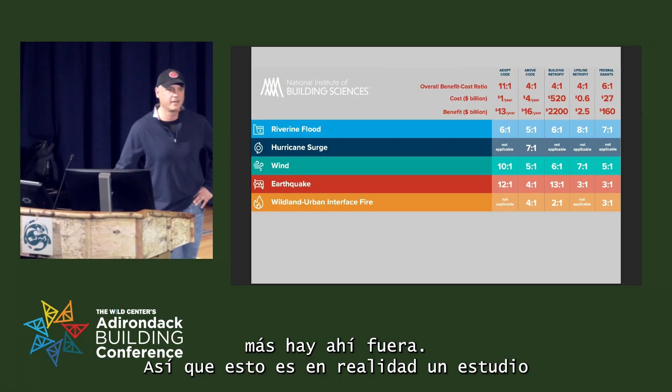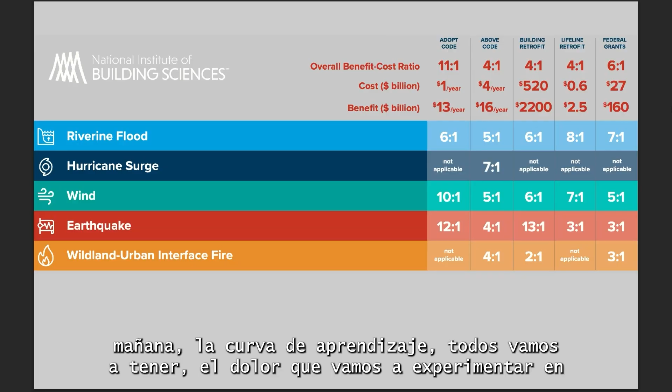So as much of the struggle that Kevin's talking about this morning, the learning curve we're all going to have, the pain we're going to experience on site - I can definitely tell you my duct systems will not pass as they sit now under the new metric if they're tested. I only know that because when I test my ducts, they fail, and then I understand where and how I have to make corrective work before drywall to fix them.

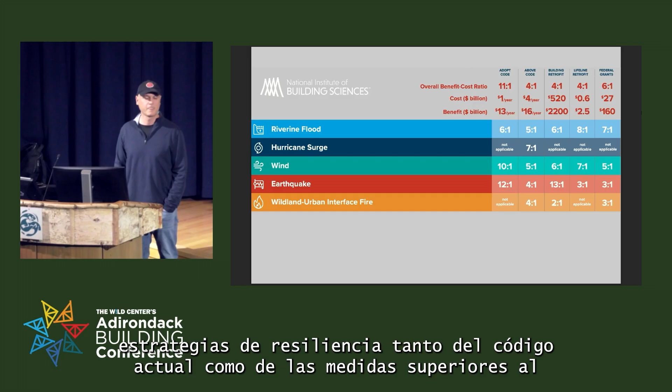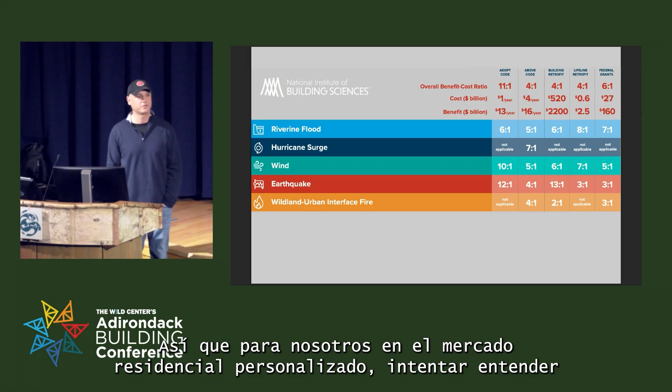These studies are out there. They show the cost-benefit return of resilience strategies of both current code and above code measures. So I can go to a client and say, here's our code minimum baseline, but I have these other recommendations I'd like for you to consider for your project. It might feel like health to you, it might look like comfort, it may be a lower or higher utility bill. So for us in the custom residential market, it's about understanding what our client values and making the argument to them, but also to the code officers about why we're doing things a little differently.

This is a study that's out there, I can share it, but basically it sets a baseline that if you do it cost effectively, you can create a lot of value into the future. It's similar to one Kevin had.

I'll show you a project a little later because we not only build, but we also do a lot of forensic consulting - we get a lot of calls typically from other builders like, hey, there's smoke coming from my ceiling, can you come figure out what's up? And the firefighters are saying it's not a fire, so what is it? So what we try to do is look to see what tools are out there.

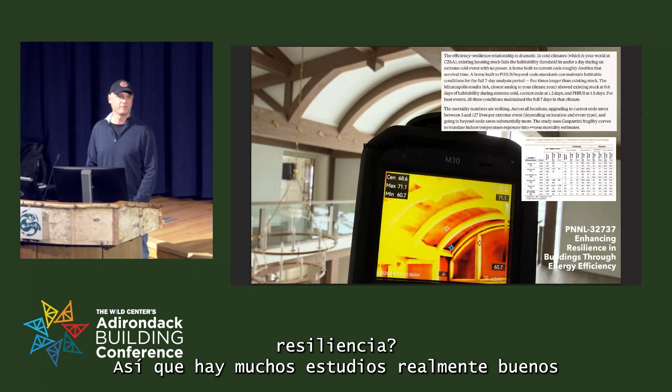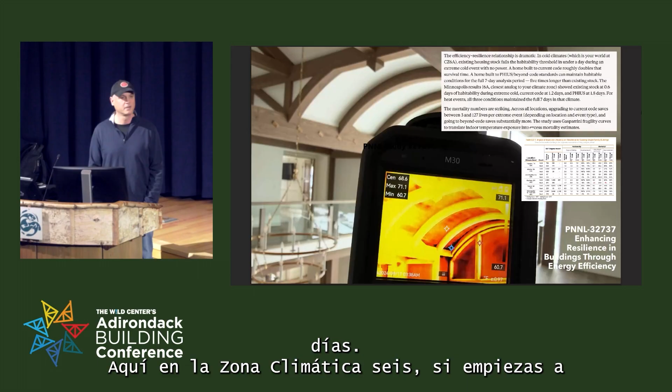But for this slide, what I really wanted to communicate is if the building and energy code look at efficiency as the baseline, how can you use efficiency to start to build resilience? There are a lot of good studies out there around passive survivability - how long you can shelter in place in your home if the power goes out. Typical buildings: less than a day. Code is about 1.2 to 1.5 days here in climate zone 6. If you start to look at passive building like PHIUS, you can extend that to 7 days.

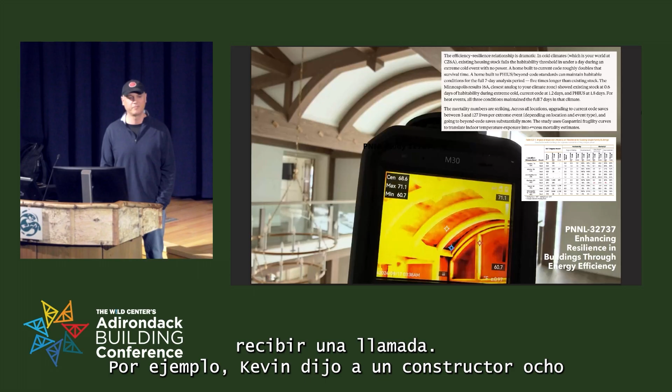But then you also have to ask: if dealing with extreme cold, do the same strategies apply to extreme heat? They generally don't. So the expectations of clients when I go say, hey, if I go to a passive level for your house, here's the cost delta, but here are the benefits - I should be very confident that I'm right in what I'm recommending, so I don't get a call like Kevin said, from a builder 8, 10, 12 months later saying, you told me if I built PHIUS or passive house, or invested in more insulation and a proper air control layer, I could shelter in place for 7 days. Well, the power's been out for 5 days and it's not livable. I can't be here anymore.

So what we try to do is take that scientific basis first. We rely on studies like this one - Pacific Northwest National Lab has done this, looking at efficiency as a baseline. I won't kill you with the graphs, but it basically shows you if you build to code, PHIUS, or above code measures, how much better that house is going to perform in terms of passive survivability, but also reduced mortality, windstorms, flooding - clear benefit there too. I won't go into it much further, but I'm sure the slides will be available and I can share these studies.

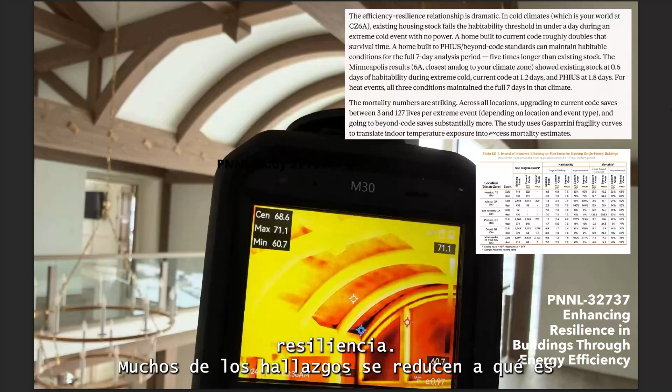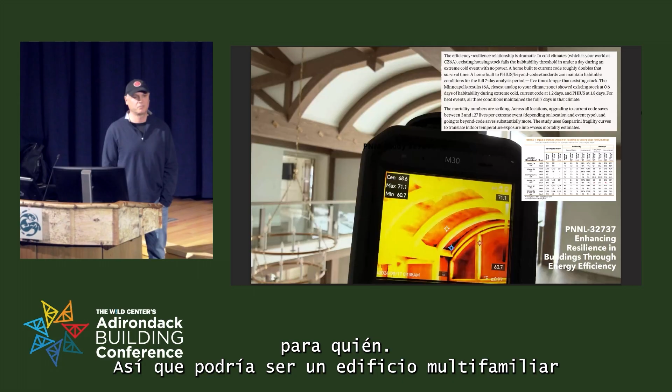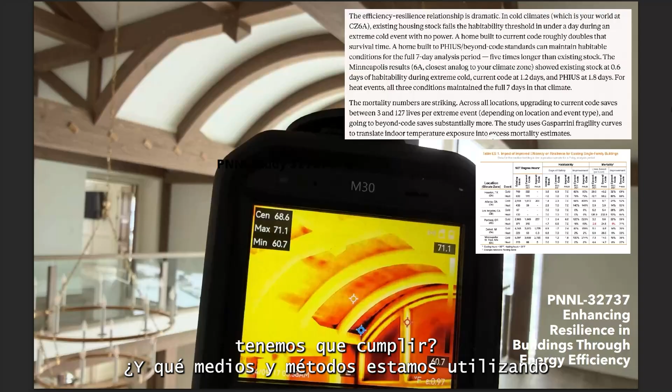So as we start to look at how to add resilience to our projects, we start with the current code and ask what code provisions are already there that we have to comply with, and then what means and methods are we utilizing to do that? How can we do it a little differently so our performance is higher? So it's not different from the code—code is baseline plus.

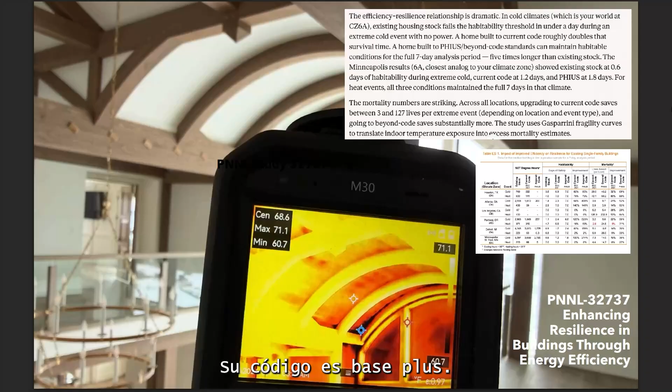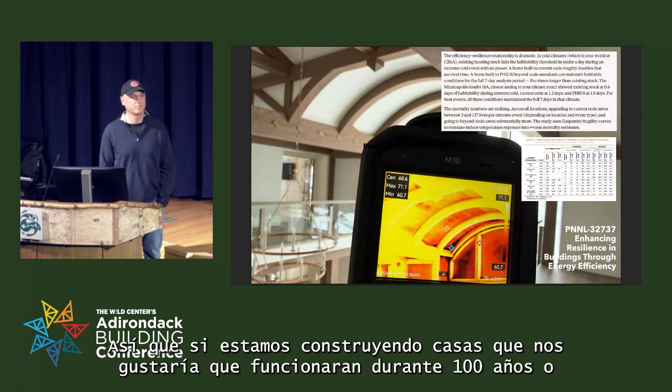So lots of studies here. Some findings, like for the energy modeling that Kevin talked about that everybody here is familiar with, are based on historical conditions, not what the anticipated future temperatures are going to be. So if we're constructing houses that we'd like to persist and function for 100 years or more, what future conditions is that house going to encounter, and is it designed to those future conditions, or was it designed based on historic conditions? I think everyone knows that house is designed to historic conditions.

Historic temperatures, historic water, rainfall, snowfall—and the future conditions our buildings are going to encounter are significantly different than even what the recent past has shown. So from a duty of care, if we're building these houses for clients who want to be in that house with their grandchildren 30, 40, 50, 100 years from now, I feel we have to understand what that future weather, that future climate, that future rainfall or precipitation is going to be.

And that directly relates to our four primary control layers—where we place our air control layer in the wall, vapor control layer, whether it's Lstiburek's perfect wall or a vapor-open assembly in the passive house world. We think pretty carefully about that to understand those heightened maximums that building is going to encounter—everything from heat on roofing, heat on sealants, the variability that Kevin mentioned in the morning session.

When you go through a 70-degree swing in a day, repeatedly, you're stressing all the sealants, the adhesives, all the connections, the intersections, the different components of the assemblies—they're going to feel enhanced stress and pressure. So how are those assemblies going to perform into the future?

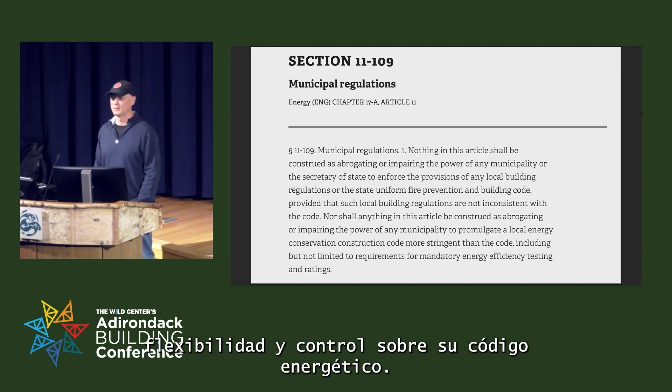So one of our projects, we just did a more stringent local energy code for Hastings on Hudson. This is a really interesting one for local municipalities that want additional flexibility and control over their energy code. As long as it's consistent with the state energy code and more stringent than the state energy code, a local municipality can actually adopt a more stringent local energy code.

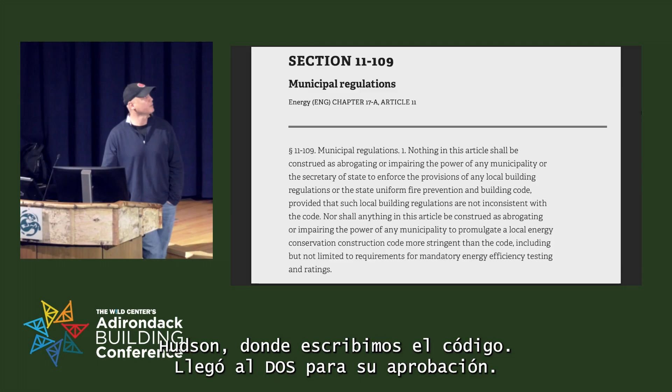So I'll show you an example from Hastings on Hudson where we wrote the code. It went to DOS for approval under energy law 11-109, and they're actually enforcing it now. The Town, City of Ithaca has done the same thing when they shifted to all electrification.

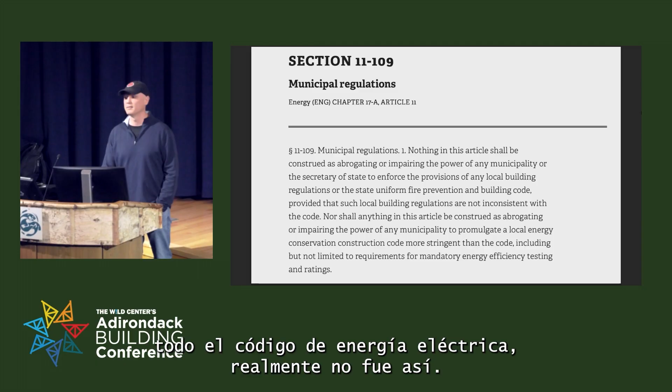The secret of that, when the headline came out that Ithaca adopts all-electric energy code, it really didn't. What they provided was optionality and no mandatory requirements, and just made it a lot easier to choose the all-electric option than the gas-fueled option. Similar to what Kevin talked about this morning in terms of 15 versus 20% efficiency, depending on whether you've got a gas appliance or not.

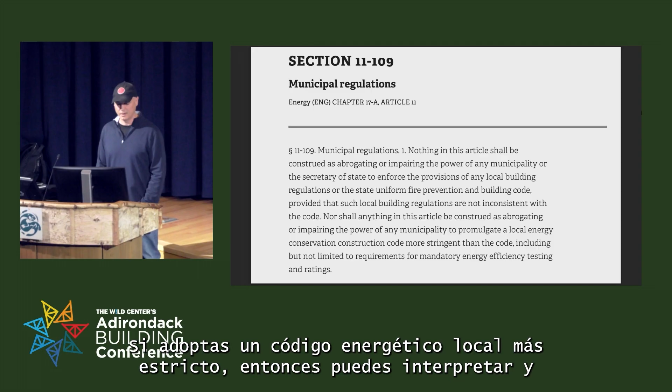So this is in the new energy code. It basically tells you exactly, gives you the permission to do it. 11-109 tells you how to do it. But the interesting thing here is the local jurisdiction, the code officer gains the ability to interpret the provisions of the more stringent local energy code. So typically, you'd have to go to DOS, submit a formal request, ask for an interpretation or variance. If you adopt a more stringent local energy code, then you can interpret and apply the code.

So Hastings on Hudson green code, this is one way that we use the energy code to bring resilience into it. This is one of the resilience provisions that we drafted for that code. Basically it said, hey, if you go to a site, look at the top 3 things that are going to hurt your building or the people in it, and figure out how to deal with them.

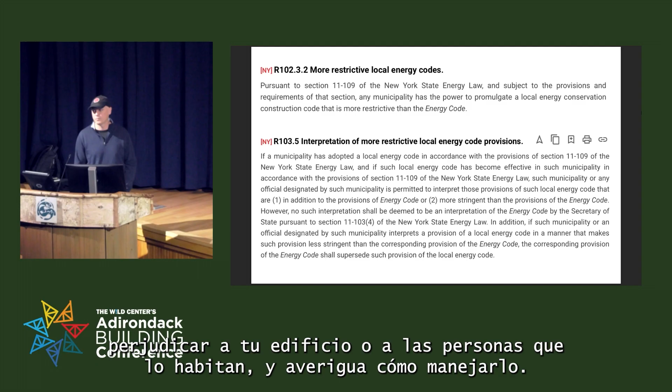Whether it's flooding, figure out whether you're in a 100-year flood zone, a 500-year flood zone, whether you don't have to worry about it, figure out whether snow or wind or whatever it is a risk. And then where you go is back to all the state level resources. The hazard plan will give you information for that jurisdiction on what those risks are.

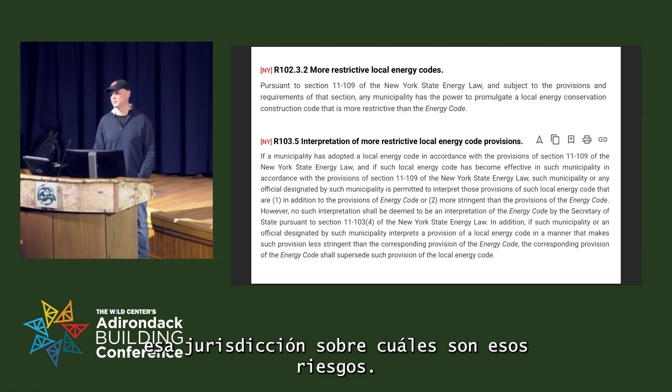I would say most builders, if they're paying attention, are going to figure out what those risks are on a site better because they're going to try to manage them anyway, whether it's flooding through on-site stormwater design, whatever it is. But you know, you can also put a lot more into just the energy code.

These are some of the provisions just for site from the Hastings code. And this was the Hastings Village Board of Trustees saying, hey, these things are important to us. Put them into the code, assign points, let's pressure test it with a few actual projects to see how and if it works. So this is a way that towns and villages, if they're dealing with issues, can bring them into the energy code through this process.

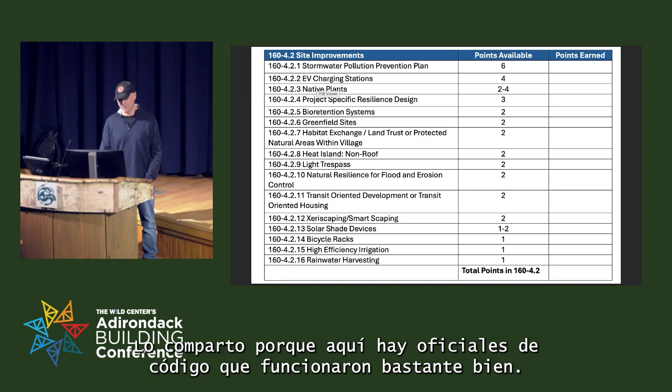So it's one way to bring resilience to your jurisdiction. I share it because there's code officers here. Worked out pretty well. Now I want to get to more of the resilience science of it and why we make the decisions we do on what we build.

So the first thing resilience would say, and I think everyone here would agree, is you can't just focus on one thing. You can't just focus on the insulation or the mechanical ventilation. And even the code itself makes these really tenuous connections between, you know, how to size manual J, D, and S, your HVAC system, how to calculate ventilation.

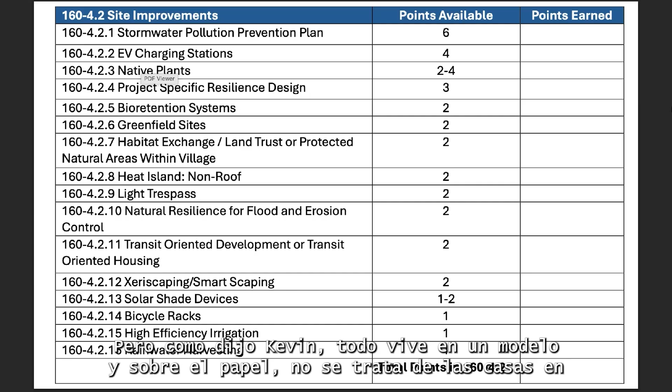But as Kevin said, that all lives in a model and on paper. It doesn't deal with the lake houses we build that are 6 to 8 bedrooms with 2 people occupying it for a couple weeks out of the year. And setting those ventilation rates in a way that doesn't destroy a very expensive millwork package, or in the summer load the interior with too much humidity and vapor to start growing mold.

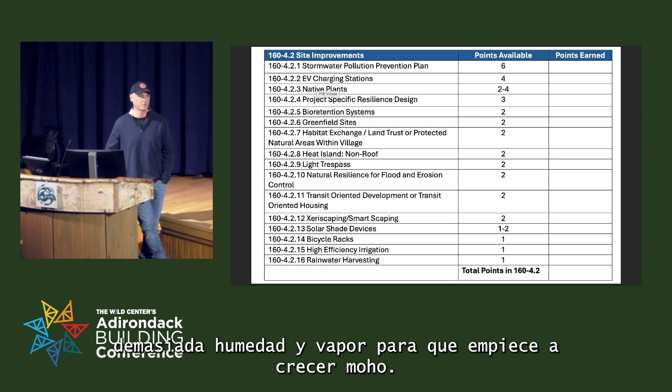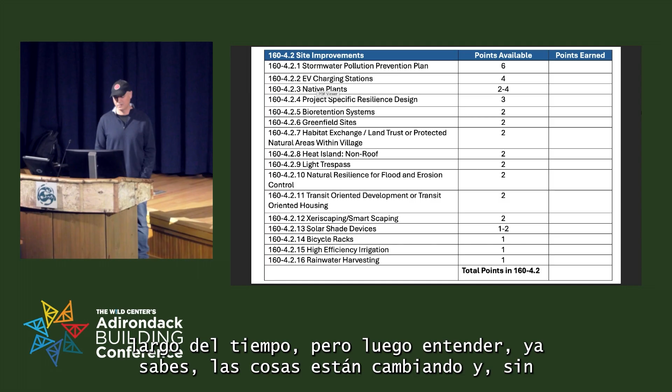So it's a way to shift from that baseline—to your point, the minimum you have to do to comply, get your CO, and do what the client hired you to do. But part of it is looking back, learning from what that site has done through time, but also understanding things are changing. No matter what someone's perspective is on climate change, its extent or cause, I think we can all agree there's a higher level of variability in rainfall, temperature, precipitation, all forms, that our buildings have to deal with.

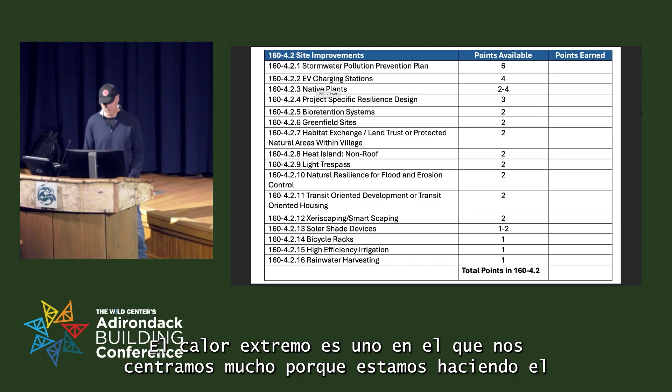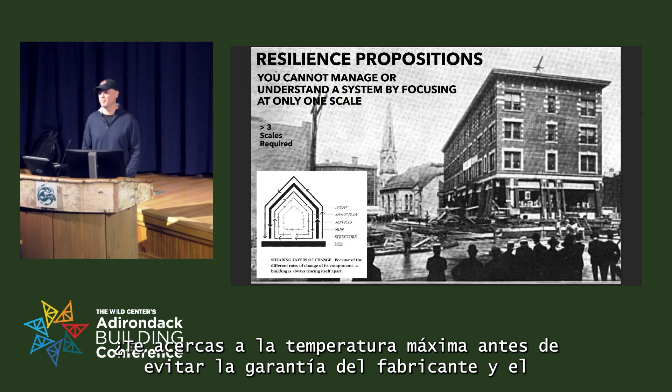Extreme heat is one we've focused on a lot because we're doing the extreme heat plan for the NYSERDA codes team now. It was really eye-opening looking at the durability of typical building components and materials. When you read the performance criteria for electrical wiring, the Romex, what's your maximum temperature of Romex in an unventilated versus a ventilated attic?

Are you getting close to the maximum temperature before you void the manufacturer's warranty and affect the performance of the Romex? I asked my electrician that, and he sent me a picture of yellowed-out neutral wires on a panel that he had to change after 8 months—different builder—because the mechanical room was so hot it started to impact the wiring.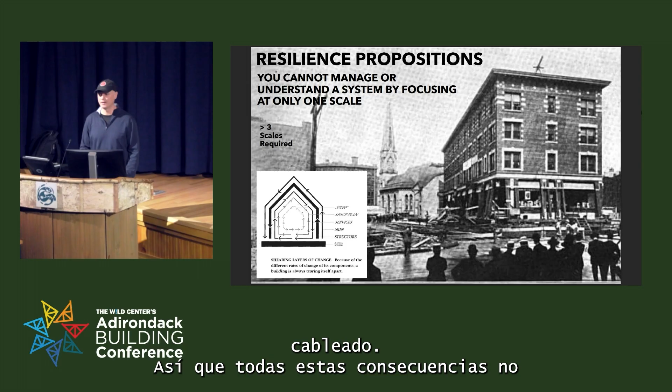So all these unintended consequences—the new breakers, new GFIs, everything giving off heat either from inside the building or from the external environment—it's starting to have impacts on things that clients would never think twice about until they see a problem. Then they look at you and say, why didn't you know about that? Or why didn't you encounter it?

So for us, I won't go into this story because I'm probably a little behind on time.

All right, so one thing we do as builders is look back, because we want to know what's in the ground. If there's an old foundation there, we have to talk to the client about structured fill, or if there used to be a river that flowed through or something that would give us a problem in construction.

This was part of a Syracuse University project to help them get to zero with residential housing. We went to the Adirondack Historical Society, and on one of the sites we were building on, we saw a picture and didn't recognize the building. It had been demolished, like most beautiful old buildings in our city centers were during urban renewal in the 50s and 60s.

That's the Hotel Truax, built in 1920. It's a 4-story, 12.4 million pound hotel that they actually lifted off its hand-cut stone foundation, rolled across the street, spun 180 degrees, and put back down on its original foundation—and the hotel never closed. It kept guests checked in and out during the entire move.

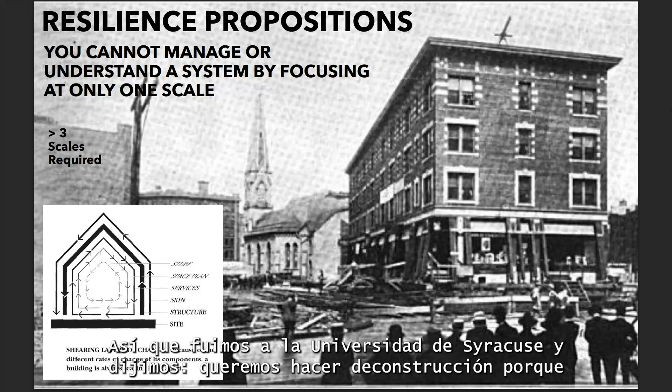So we went to Syracuse University and said we want to do deconstruction, because deconstruction is a key resilience strategy—it's embodied carbon, workforce development, a value-added thing. They were terrified of the idea of deconstructing a house, but it's kind of the reverse of construction. When we showed them this and said that's what builders did in 1920s Syracuse, why can't we do that on a site locally?

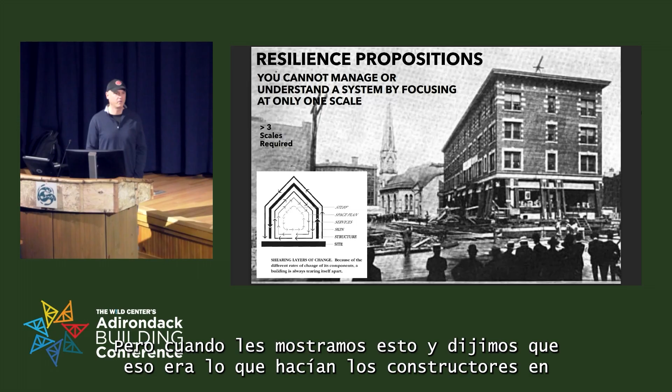So for us, time is part of the tool of design, where we look to see historic conditions. We understand what the code is telling us, the environment the code is telling us to build to with the climatic data included in the code. And then we ask, is that going to work here for the next 100-plus years? Generally not, when you run into limits like the Romex maximum temperature, or the maximum temperature of caulks—what type of caulk to use.

Because if it's a simple decision between silicone or urethane for a certain condition, and silicone has this maximum temperature while urethane has that one, then why not go with what you know is going to work and is going to be exposed to?

It's just better building, less callbacks, less problems, however you want to phrase it. So we realized looking back is really important, but we also realized how the code treats a building at multiple scales. When I'm talking scales: structure, skin, cladding - the 4 primary control layers that Building Science Corp talks about, and how those are all integrated, because typically the code thinks about materials, not assemblies, in terms of where's the primary air barrier.

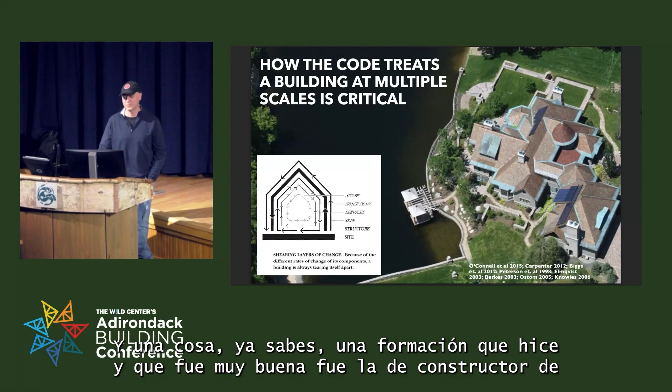One training I took that was really good was the PHIUS Certified Passive House Builder. I don't know if anybody else here has taken that course, but it's a really good exercise in looking at the different characteristics of each material in an assembly and understanding that there isn't just one line in that assembly, to Kevin's point, that is the primary air control material. It's an air control assembly.

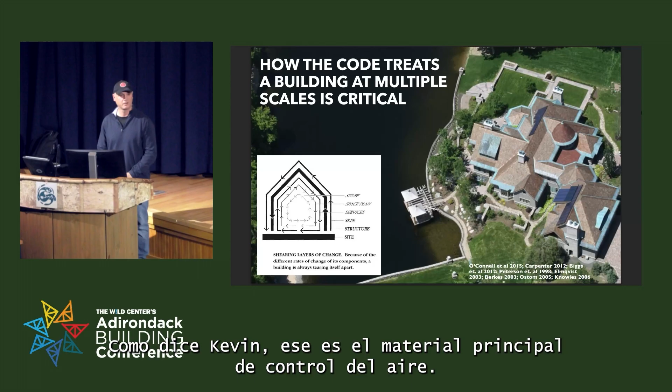And then how are these assemblies going together at critical connections - top of foundation wall to wall, from wall to ceiling - because that all really, really matters. Those are our vulnerable weak points in any assembly.

So this is just a picture from a really great book Stewart Brand wrote, How Buildings Learn, meaning how buildings experience change over time. So we just break it out, different components over time and what's going to fail and where. And we don't want to entangle a failure in a layer that should be there a lot longer.

So structure should be there for 500 years. If you go to Europe, you see buildings that have been there for 1,000 years. So why can't we, to your point, code being a minimum, build a house for 500 years? Everybody laughs at you when you say you're going to do it, and it's going to require maintenance, absolutely. It's not like you're going to leave the same roof for 500 years, but why can't it be there?

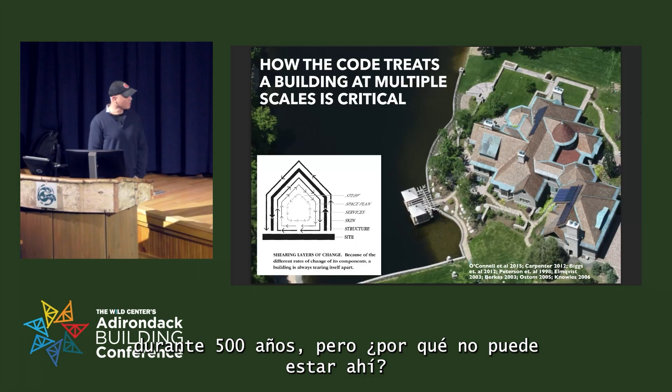And making sure each of those layers that the code deals with, and how you install those layers, is really critical, so that you're not having to demolish something in 30 years that could have been there for 100 years.

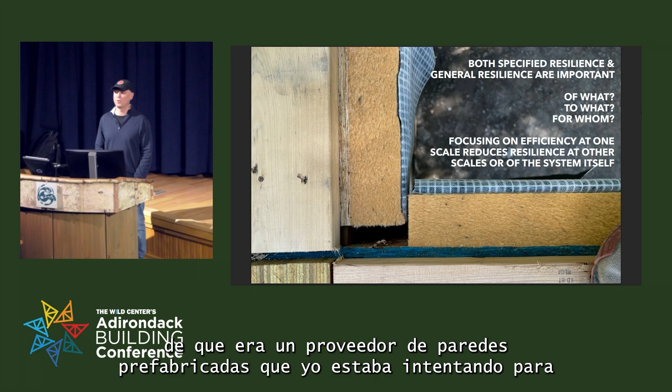So you get a lot of stuff like this, and I'll get into your point about innovation and creative materials. This was the argument I had - it was a prefabricated wall supplier that I was trying for a guest house. And I lay under the wall, I take the picture, and I'm like, okay, we got to talk. This isn't going to fly.

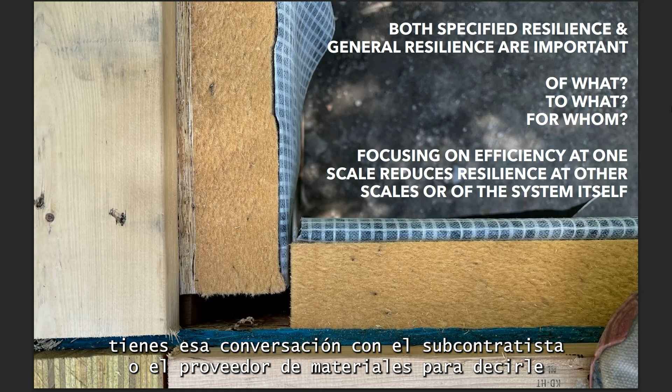They wanted to put a little bead of sealant on the corner there, and they showed me a cartoon picture online that said, look, you just use the sealant, and that we're only worried about air. I'm like, I'm not only just worried about air there. When you don't have the manufacturer's installation instructions at a level of detail, how do you have that discussion with the subcontractor or a material supplier that, hey, you didn't do it right? So it doesn't turn into just an argument that doesn't have a clear baseline to it.

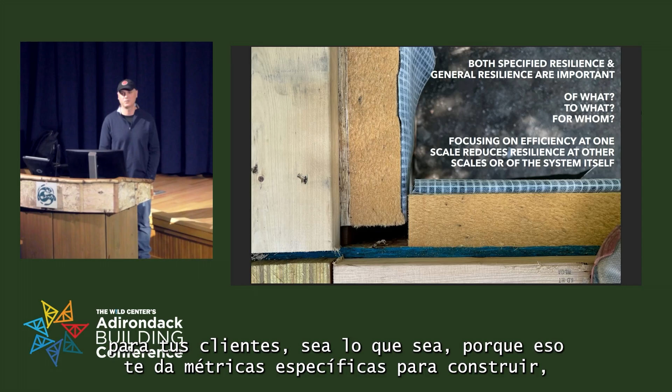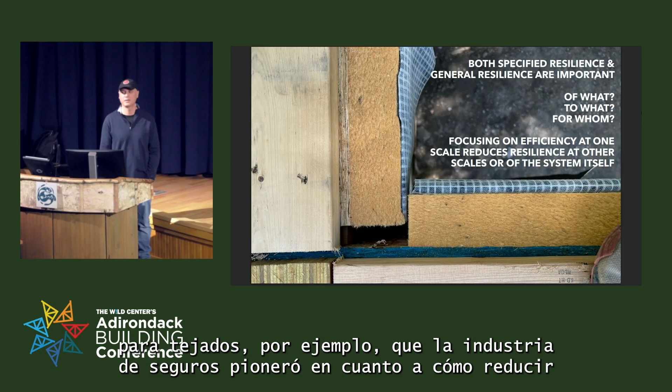Going on that, the only point I would make here goes back to the ICC resilience - you always have to ask the question of resilience of what, to what, and for whom. So, of an enclosure to hurricane for your clients, whatever it is, because that gives you specific metrics you can build to. You can look at the ASCE wind data for your location. You can look at fortified roofing standards, for example, that the insurance industry pioneered in terms of how to reduce your insurance premiums if you just build to the fortified level.

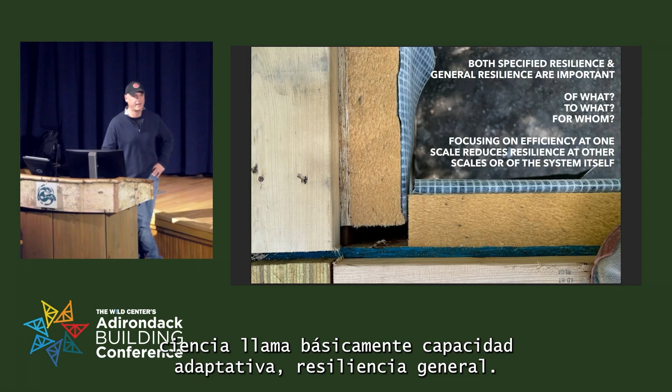And it's all really simple, good practice for roofing anyway. They give you checklists, very easy to do. And what you're trying to do is not just the specified resilience, but what the science calls basically adaptive capacity - general resilience, to the unknown.

So like the microburst that the Adirondacks might see only once in 500 years - do you design to it? Is it worth the investment from your client to do that, or to not do that? Those are things to at least think about. And then to look into the near future over the next 30 years, which those state level resources do, to say, are those type of severe storms going to become more common in this area? And if so, maybe fortified makes sense for you, for the location.

But this was one of our consulting projects we got called to, to your point - we'll get to the innovation. So we were building a house about a quarter of a mile down the road, and you know how on job sites people talk, they're like, oh, there's this house down the road, it's got some trouble, but kind of bouncing back and forth.

So one Saturday the owner called and said, hey, can you come take a look? We can't fix a roof leak. And so we went, Kevin and I jumped on the roof, and said, well, we can fix the leak very easily, but how do you approach that?

For me, frankly, I'm probably not a good enough building physicist to look at that like Lstiburek or Straube would and pick it apart with the PhD level analysis. But you've got manufacturing, installation instructions.

Does anybody ever use or read ESRs at all? The evaluation service reports - those are really critical. I'll show you a photo of one.

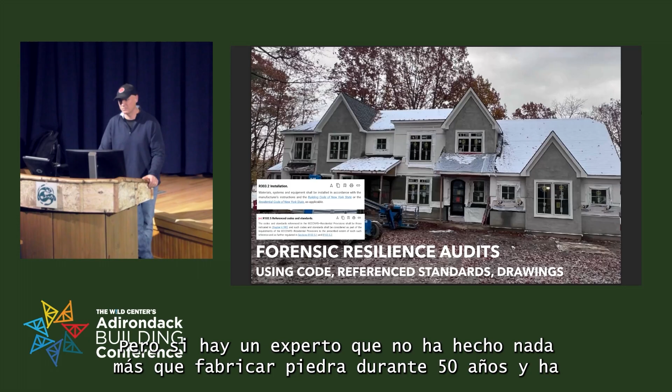That's where, I think as a builder, the best thing you can have is some humility and just say, hey, there's things I know well and things I trust and I won't negotiate or break. But if there's an expert who's done nothing but manufactured stone for 50 years and has written that tech spec, and you can get that person to the site to look at it and say, yeah, I agree with you that my detail, my MSV detail in the Manufacturers Association, conflicts with the EIFS detail - so do this, and then get a sign off and move forward.

Yeah, because I mean, the power that you have as an AHJ code officer is really immense. Part of the other training that we do for energy code is, you can require me to remove sheetrock to inspect the air barrier. If I don't get my air barrier inspection, you can make me take that off. A lot of builders don't understand that.

So absolutely - that's where, to your point, understanding how these different requirements play into the project and what weight they carry is really critical. Because if I just say, hey, I built to the energy code, but I didn't read the manufacturer's instructions, then I've not done my job properly. And if I don't go look at the ESR that is either fully consistent with those installation requirements, then I can check that box and say, all right, code, manufacturer's requirements which are code, ESR - all agree.

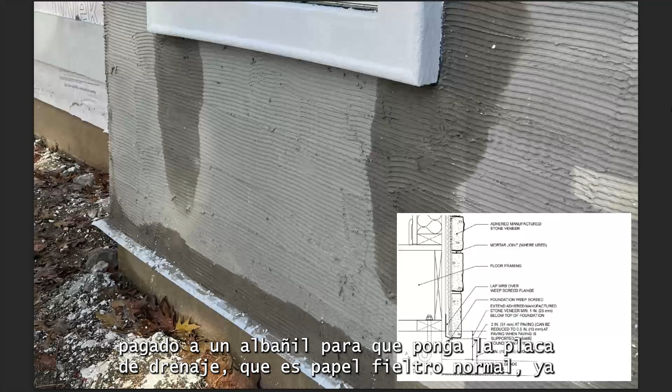So we come here, we look at it—there's one of the details from the Manufactured Stone Association, looking at the weep screed at the bottom of the wall detail, we're looking at the wetting pattern. Now we've got to tell the client: you paid a mason to put the drainage plane on, which is just regular felt paper, the weep screed, all the rest of it. But with what we're seeing, we think that wall's wet.

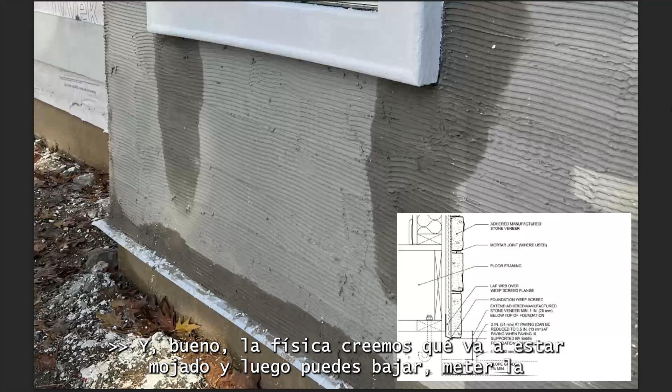How do you know? Well, physics. We just believe it's going to be wet, and then you can get down there, put your head underneath, and see. So we told them we have to take it off because it's the enclosure. Water's the primary damage function of a building after fire and structure, so this will destroy it. And this house was only 8 months old when we got to it in construction.

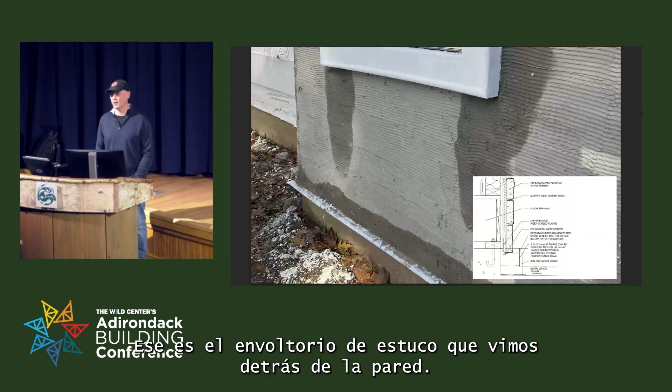So we looked at it, started to take it apart. This was actually under the EIFS elsewhere—that's the stucco wrap we saw behind the wall. It was like a nice interior drainage plane that went down. That's a moisture meter at the bottom showing the OSB is saturated. It kind of flaked off in our hands when we even just tried to touch it.

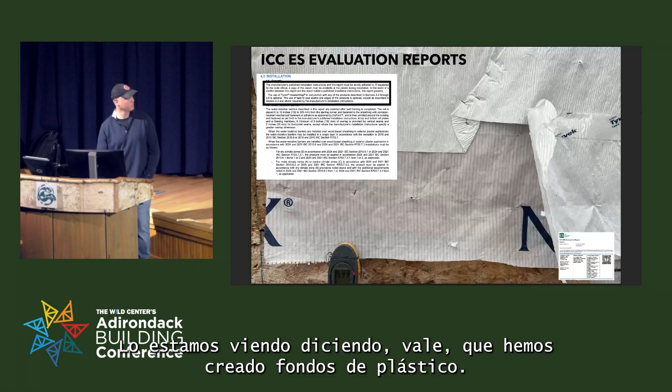So there's the manufacturer's detail. We're looking at it saying, okay, well, that weep screed at the bottom is plastic. It certainly doesn't extend past the wall the inch that it needs to be. So you're already not in compliance with code—that's at least one code violation we're looking at there.

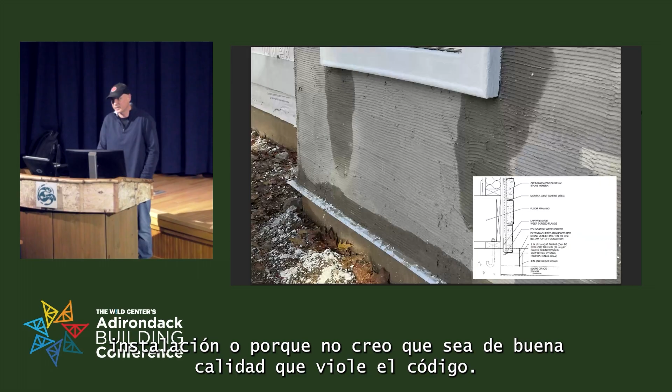And then the argument's really easy: it's got to come off. It violates code, it needs to be removed. Not 'Josh Stack thinks it needs to be removed because it's not a good installation' or 'I don't think it's good quality'—it violates code, it's got to go. 'Well, I don't see it in the code.' Well, look at the manufacturer's installation requirement—it's right there. That's part of code.

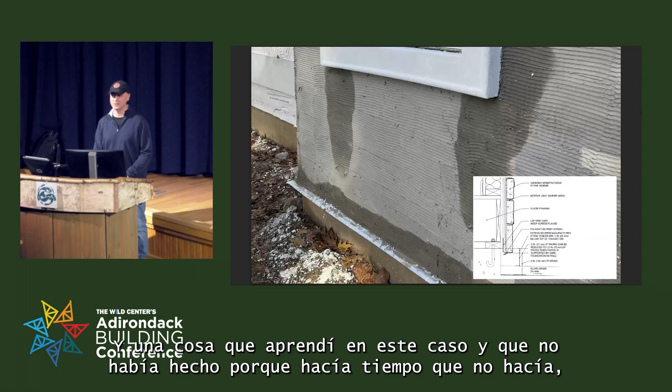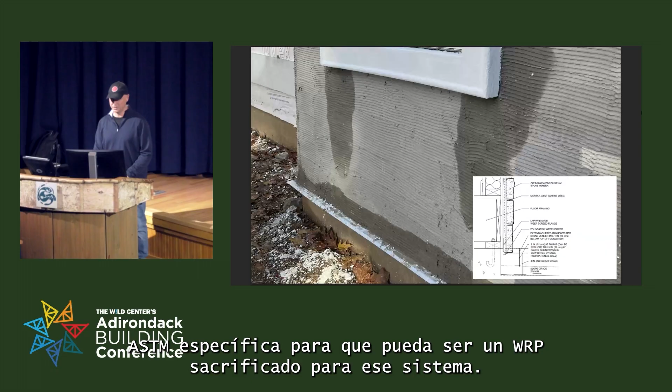Yeah, the one thing I learned on this one that I didn't know, because I hadn't done EIFS in a while, is it's not just the 30-pound or number 30 felt. You need a specific ASTM rating on that felt for it to qualify as a sacrificial WRB for that EIFS system. So you can't go to Home Depot or Lowe's or the local lumberyard and just grab number 30 felt and put it on the wall over your primary WRB, because it doesn't have that ASTM rating.

And then, in the forensics world, is it causing damage? No? Okay, then I'm not interested—some consultants would say that. I don't care, I only want to see things that have failed, so what if it has a rating or not. But here, not only did it not have the rating, it also failed.

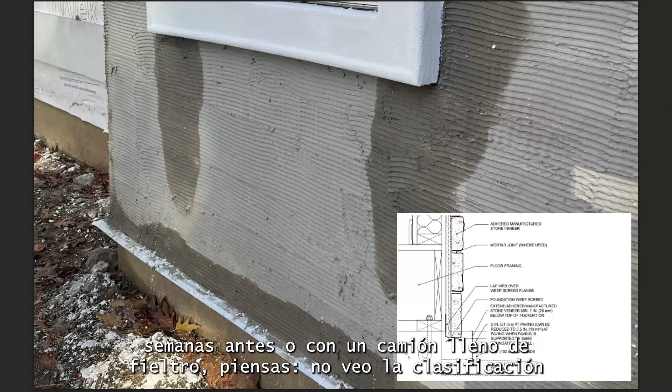Once you get into this situation, it's almost like the code just piles these violations on top of each other. I say that as a builder because it's sometimes very difficult. If your EIFS contractor shows up 2 weeks early or with a truck full of felt, you say, I don't see the ASTM rating on the felt, you can't use it. Then an hour later they say, that's 2 weeks out, I have to shift schedule, well you should have known that was the case. I mean, it didn't happen here, but hypothetically, you guys know, being in the construction world, that's how it goes. You pull it off the shelf and use it so you can keep moving and finish. So that's what we saw, stuff like that.

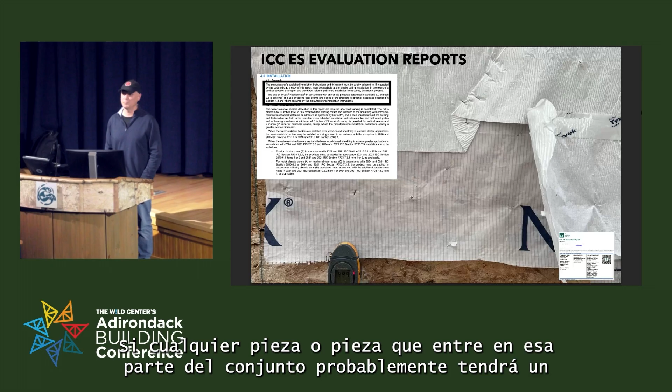So this is the ESR, in black you can't read it, but it basically says in the event of conflict between the report and the report holder's published installation instructions, this report governs. So as a builder, that tells me I have to go read the ESR. When you get to an enclosure, I think I read probably 12 ESRs, because it's not only the ESR for the stucco wrap, it's the ESR for the flashing, for any sort of caulking or sealant. Any piece or part that goes into that part of the assembly is going to most likely have an ESR tied to it. So you have to go look at it.

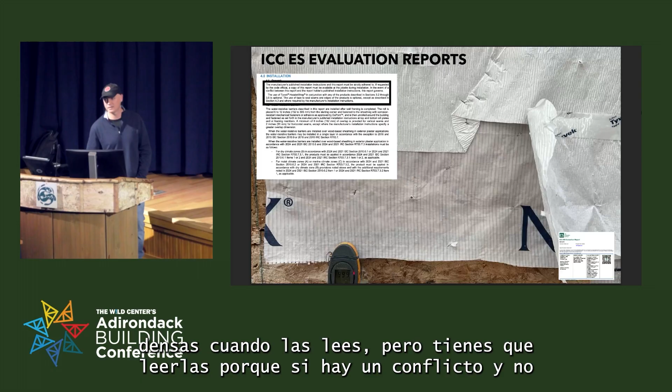That's just down in the lower right, there's a website you can go. They're free, sometimes difficult to discern because they're really dense when you read them. But you have to read them, because if there's a conflict and you don't follow that ESR, you're at risk for it. So these sort of things, this was just after we removed the EIFS.

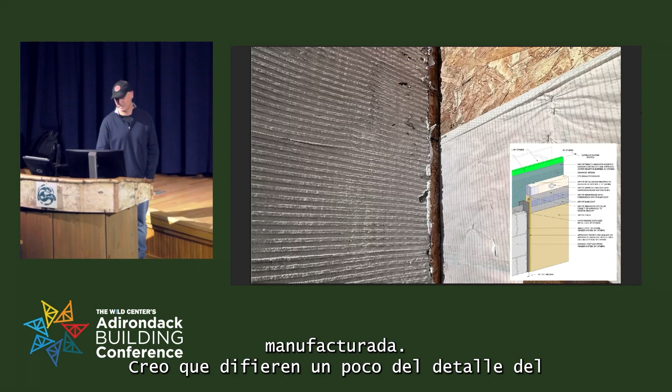I mean, just poor practice, doesn't even comply with code. But how can you say it doesn't? Well, that's again the manufactured stone detail, I believe there differs a little bit from the EIFS manufacturer's detail. But you put them together, look at it on the wall, and you've got multiple code violations there. It just needs to be redone.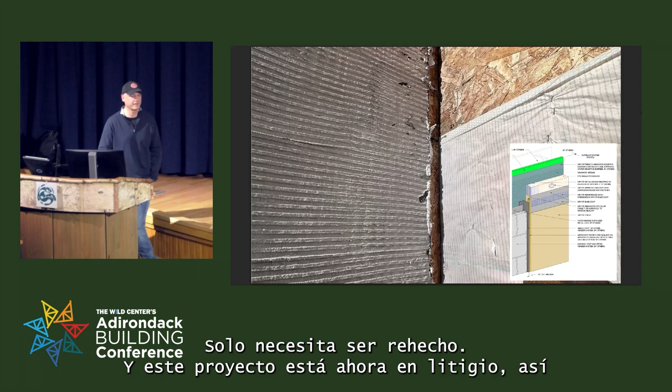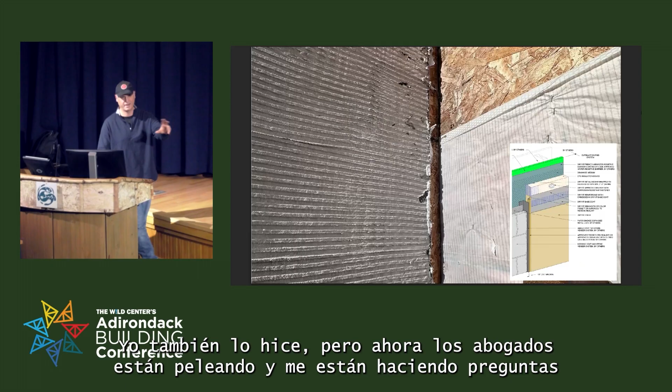This project's actually in litigation now, so I try really hard not to go there because we typically represent builders, not homeowners. But this was the first project I've agreed to take over for a homeowner in a very long time, and I did it because the homeowners are just really great people, really close to home, and they just really needed help. So I did it, but now the attorneys are fighting it out, and I'm getting questions I never wanted to answer, like hey, what's the damage here?

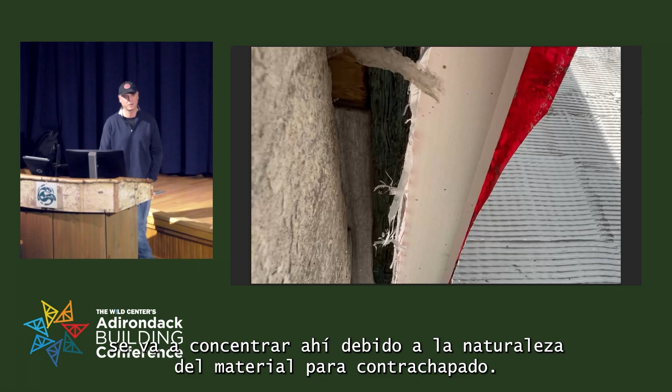So who knows what happens there. But so that's the bottom wall. When you look at it, everyone knows now, I think, to tape the bottom edge of the OSB to the ground is a good practice. But here they put a weep screed at bottom that doesn't, actually you can't even call it a weep screed because it's not that per code. You see the stucco wrap tucked behind it. It's like the Lstiburek thing, you've got your raincoat tucked into your pants, and it does that. So we're taking the sheathing off at the bottom because, again, with OSB, the failure is going to concentrate there due to the nature of the material. For plywood, maybe it wouldn't have had to come off, it wouldn't have delaminated, could have dried potentially.

So that's kind of from the forensic side, how we use code, ESRs, manufacturer installations, and reference standards in code to understand resilience. I talked primarily about durability, but it could be anything. It could be severe storm resilience, it could be extreme temperature resilience, it could be any of those things.

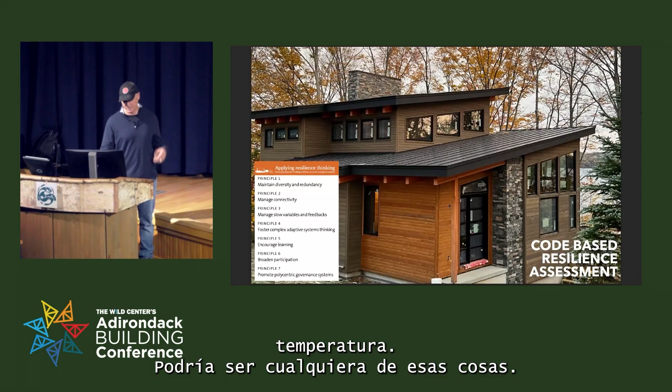This is on the left, it's from science. Over the past 40 years there's like this global community of scientists, similar to the building scientists, but resilient scientists got together and said, hey, what are the common principles you can use for anything? And those are the principles.

So diversity, redundancy, I'll talk about. Connectivity, obviously, that everyone here probably understands. Connectivity of building enclosure to mechanicals, conditioned space to unconditioned space, very easily. So you think about how and if those are connected, and how your solar or your backup generation is connected. If it's whole building, or if you're just going to feed critical functions of the building with your generation, all these connections get to be really, really important in how you do it.

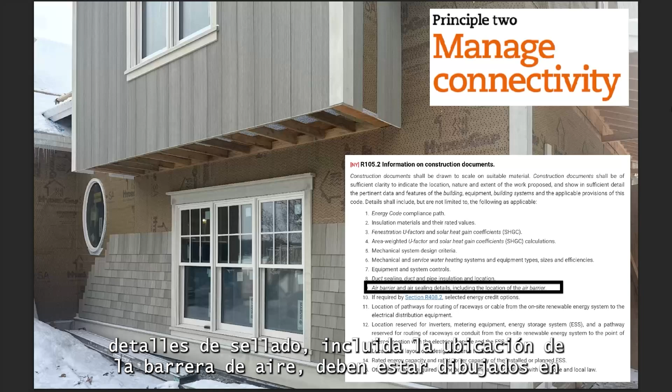As Kevin talked about earlier, the air barrier and air sealing details, including location of the air barrier, have to be drawn on the construction drawings. And as a builder, I would tell other builders, don't be the person that draws that. Make the designer do their job and draw it for you.

Work with them, because it's the same team. We're all there for the owner, and it should be constructive. It's what we call an integrative construction process, similar to the integrative design process. We started doing that because in the integrative design process, we'd go to these charrettes, and the designer would be there, the owner would be there, the president of the air sealing company, or an executive of the installation company would be there.

Then we would show up for the job kickoff meeting for the first unit in a multifamily project like Kevin showed, 700 units. Okay, we're at the first unit. Let's do everything we talked about from the design side. We worked really hard to get all of the air sealing details into the project documents, thermal control layer into the project documents. We go to that first unit to meet the insulators, and it's the first time they've ever seen it.

They're like, nobody told me we had to do this. And it's call the supervisor. Hey, these guys want me to air seal that rim joist over there. Nobody told us that. Well, it's not in the bid. Like, well, it's in the project drawing.

So what we did instead was say it has to be an integrative construction process. We want to talk to the people actually doing the work before they show up that morning to do it. And we want to have them at the beginning of the process so they understand why it's so important too. Like, I forget the lady's name in Rome, so she understands why it's important before she shows up to do it, and that she's enabled to be successful every day on that job when she's doing it.

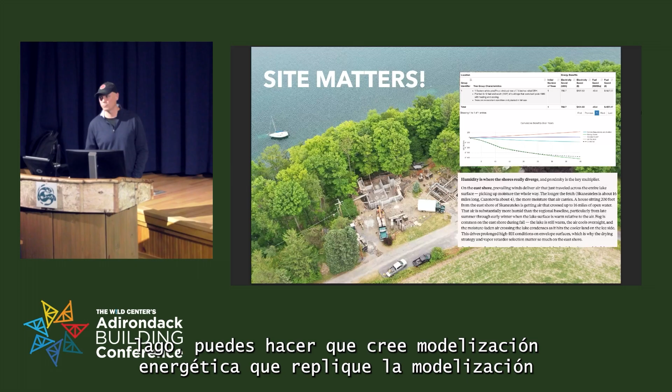Okay, so it has its limitations, but for stuff like humidity, for how to build on an east versus west side, to Kevin's point earlier, how to detail those lakeside facades, you can have it create energy modeling that replicates energy modeling. So for me to understand passive survivability, when I'm trying to understand my primary thermal control strategy, I can actually have it model, hey, if I go to an R60 versus an R49 at X dollars, does it make sense? No, it doesn't.

So I can go to the client and say, you know, I know you read it or saw it or something, but it doesn't make any sense. And I validated it pretty quickly.

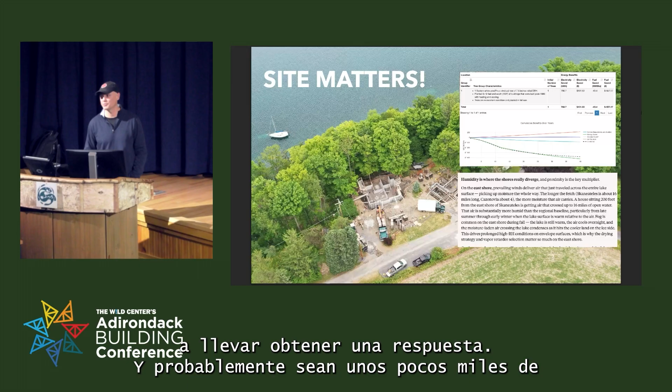If you want me to really validate it, I have to go hire an energy modeler and wait a couple weeks, because that's how long it's going to take me to get an answer back, and it's probably a few thousand dollars. So it's been really helpful to try to figure and think through these things, even if it's only 60, 80% right, and it took a lot of time to train it.

Yes, and the biggest problem I've got is continuity when it breaks session. So I have to have it store and write its own memory, basically, because it will learn. When you correct its mistakes, it will get better each time, and it gets better very quickly, like 5 to 10 minutes often. So it's very useful, but at the low level, entry level, and mid level, I'd be really worried, because Claude's a heck of a lot better than where I was starting out 30 years ago with this stuff. I'll put it that way.

So this is kind of our conversation earlier about energy code intended to provide flexibility, permit innovative approaches and techniques. We talked about how that relates back to ESRs. Manufacturers are always trying to introduce innovation into the market.

Builders typically have to suffer from the failures of the innovative products, like the first low VOC paint - Kevin could probably talk about that better. We were like the first ones to use that in the area, at least. We were also the first ones to install a James Hardie product before they had the clearances. I always have to argue with the Finnish carpenters, because Finnish carpenters want everything tight - they don't want any clearance from a shingle to a sidewall.

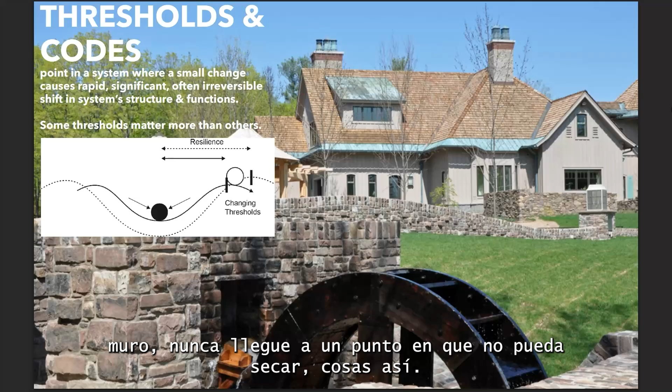So Kevin talked rain screens, vapor control, those sort of things. I kind of talked about this before, thresholds. I'm always looking for what that key variable is, that key point of failure at any assembly, any material is, so then I can design in a way that the wind never reaches the threshold that rips the roof off, the wetting of my wall never gets to a point where it can't dry. Those are all quantifiable. You can put metrics to those. In fact, the manufacturers typically tell you what those metrics are.

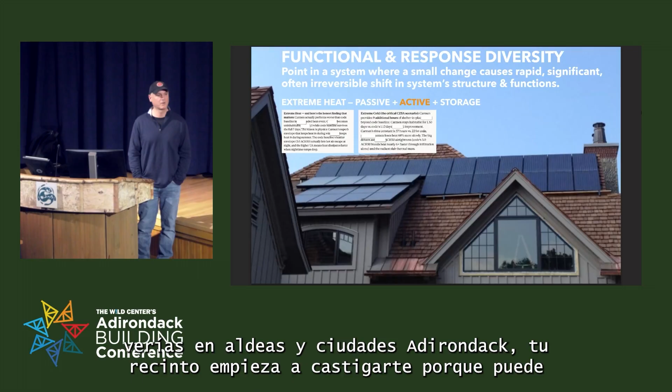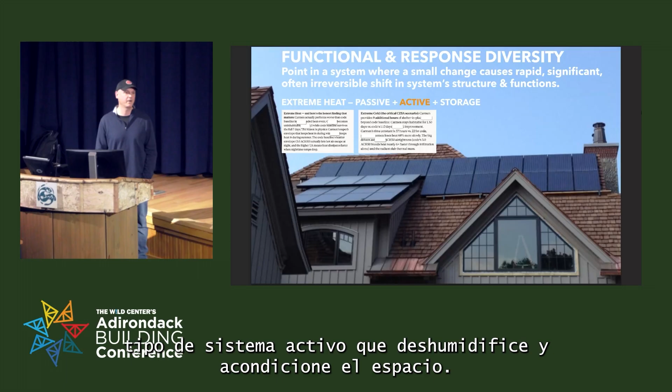Just a last note here. Everybody talks about passive survivability as an inherently good thing, and I agree that it is, especially in extreme cold. But when you get to extreme heat situations, urban heat islands that you'd even see in Adirondack villages and cities, your enclosure actually starts to punish you because it can trap heat if there's no nighttime cooling, any active system that would dehumidify and condition the space. So if everyone starts to shift to more passive building or enhanced thermal control, just be aware there's a counterintuitive impact on extreme heat for prolonged events, particularly power outages.

The last thing I'd say here is that's where diversity becomes a strength, and redundancy becomes a strength that has value. So if you're thinking about the function of how to provide a livable environment for your client, maybe not comfortable, but livable, shelter in place without heat, the first strategy is passive survivability, enhanced enclosure. However, if you can add some sort of active backup like battery, whatever it is, then you've got two different ways you can provide that same function.

So if the power goes out, you've still got passive survivability. But if the power goes out and you've only got passive survivability, you can actually enhance the resilience if you add battery storage, or you can island your PV. So the more ways that you can provide the basic functions to your clients that aren't wiped out from that same disturbance, the better it is.

So I would just leave it there. Probably don't have time to go into this.

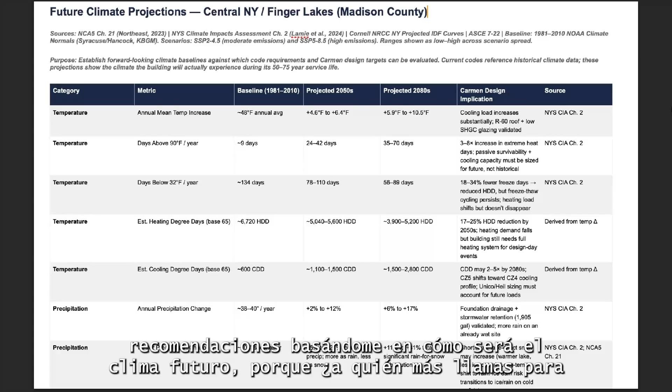Some of the stuff I'm using for Claude right now, like, hey Claude, what does future climate in Skaneateles look like? Did you really read the data, Claude? Yeah, I did. Okay, so give me a table on whether I am making my recommendations based on what the future climate is going to look like. Because who else do you call for that?

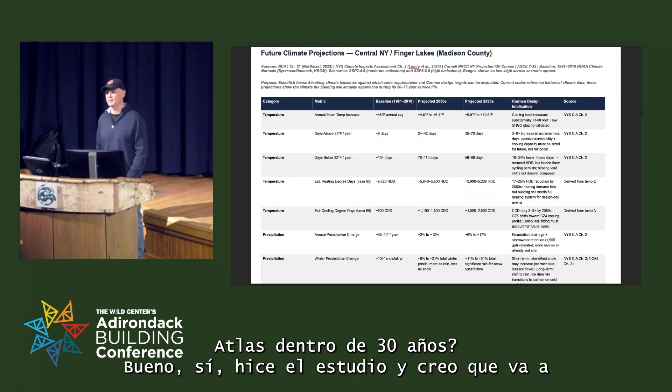30 years ago, like you said, it's the Wild West. We would call a Syracuse University professor and say, hey, you did a great study, can you talk with us, just an hour on the phone or meet for lunch on what you think rainfall is going to look like in Skaneateles in 30 years? Well, yeah, I did the study and I think it's going to increase by 15%, maybe. But now there's enough data to run a model and be like, okay, here's my site. You've got future climate models, you've got future temperature modeling that's already integrated into code.

So what should my enclosure look like? Claude will crank out, this took them 10 minutes last week to do. So I haven't validated this yet, but it's a starting point I wouldn't have had.

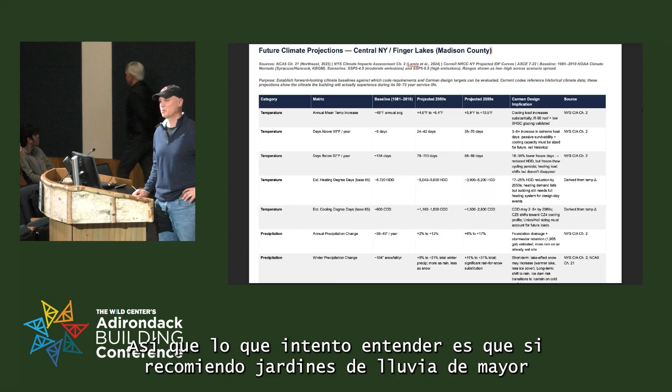What I'm trying to understand is if I recommend larger sized rain gardens, for example, or bioswales, do I look like a jerk 40 years from now when the client's like, I haven't seen a drop of water in that for the last 20 years? Or, hey, you were right on that bioswale to the south, we got overwhelmed last week.

There's no maximum indoor temperature. New York City's actually passed, or is considering, a local law that requires building owners to install air conditioning, to maintain a maximum indoor temperature during heat waves. So how do you even monitor it? How do you enforce it? How does the code officer show up and say, hey, I saw your sensor, you violated the maximum indoor temperature last week, so here's your violation?

No passive survivability requirement based on historic climate data. Compound events are when you get severe storms and power outage, or typically when you have a heat wave, you also have a storm, or you have a storm and a power outage. So you have to think from isolated events to all the stuff that hits at the same time. So I'll leave it at that. Just say thank you very much.